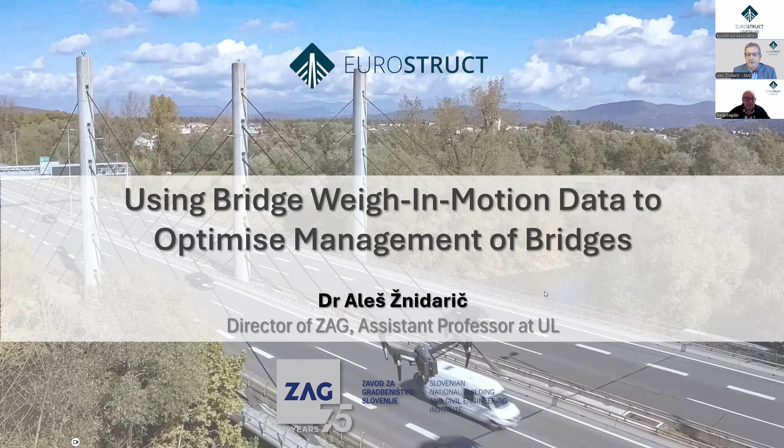So what I'm going to present today is roughly this: very briefly about bridge assessment and management, what is the motivation behind it, how do we measure heavy goods vehicle traffic, and then I will switch to structural analysis and bridge WIM. How can we couple those two methodologies and technologies, primarily by modeling traffic load effects on bridges? How do we measure some bridge KPIs with bridge WIM? I'll demonstrate how this works with some case studies, and I will conclude my presentation with work in progress and some ways forward.

If we start with motivation, a possible question of a bridge owner can be: how to sustain or improve the overall condition of the target percentage of the structures on my network, so that they are rated as such or higher, so that they don't fall below a certain level of damage intensity. So the questions are: what is rated as good and acceptable? How does condition affect capacity and later on safety? How do we assess or measure loads and performance of our bridges?

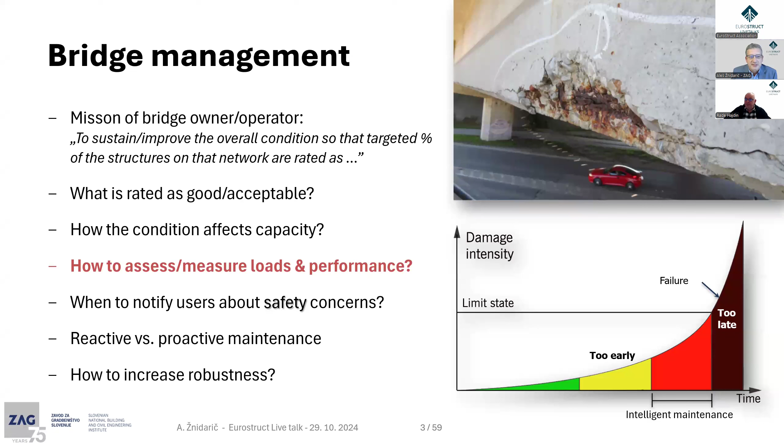I will focus today on this third question: how to assess and measure loads and performance in bridge management. First, a few words about bridge assessment — I will just repeat the well-known facts, if you wish. What is the difference between design and assessment?

I think we can agree the design of new bridges should be conservative, first of all because of uncertainties and changes of loads during the lifetime, because of decreasing capacity, and also all other unknowns during the lifetime. On the other hand, the assessment should be as optimal as possible, because it's expensive to post, strengthen, or replace a bridge. There is some estimate that adding 10% of capacity during construction increases costs by 10%, while if you do it afterwards, it goes into the hundreds of percent. So obviously, it should be optimal.

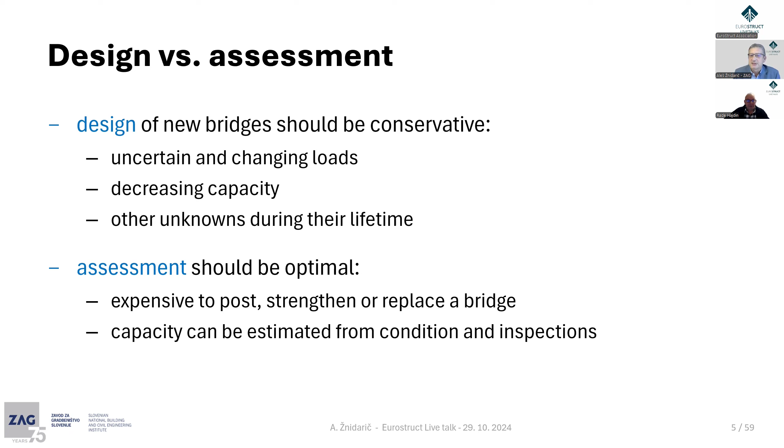Capacity can be estimated from conditions and inspections, and also loading can be measured and monitored. This is what we are going to talk about, and I will try to demonstrate how Weigh-In-Motion, particularly bridge Weigh-In-Motion, can help in optimal assessment.

Very briefly about structural safety of bridges. We want to ensure that capacity is higher than the loads. With bridge capacity, we have several challenges, especially with older bridges. We don't know exactly what materials were used, how much material was used, particularly reinforcement, what characteristics these materials have, and where they are in our structures.

The conditions change all the time, including climate. We try to get this kind of information from archives, from field testing, from non-destructive testing, which is not done all the time.

We name this procedure the bridge assessment trio. You start with inspection of condition and its assessment, then you move to some measurements and monitoring, and finally you do structural analysis and try to get out as much as possible, as much as needed.

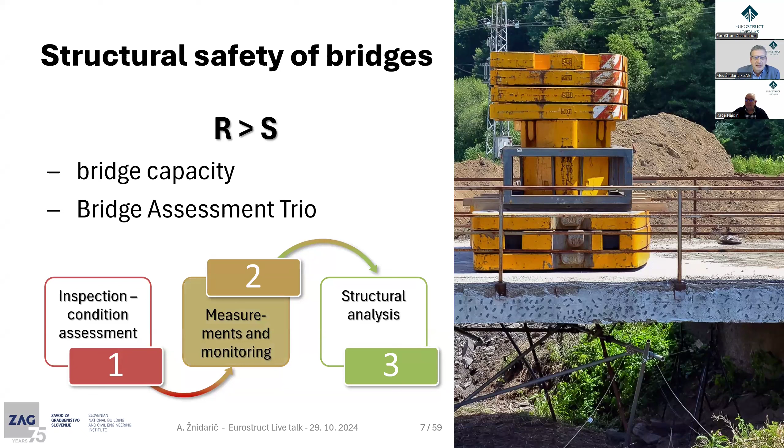Again, I will focus on the second item on this diagram. If I start with measurements and monitoring, what we typically do is material characteristics and damage extent monitoring and assessment, and we try to evaluate the actual loads.

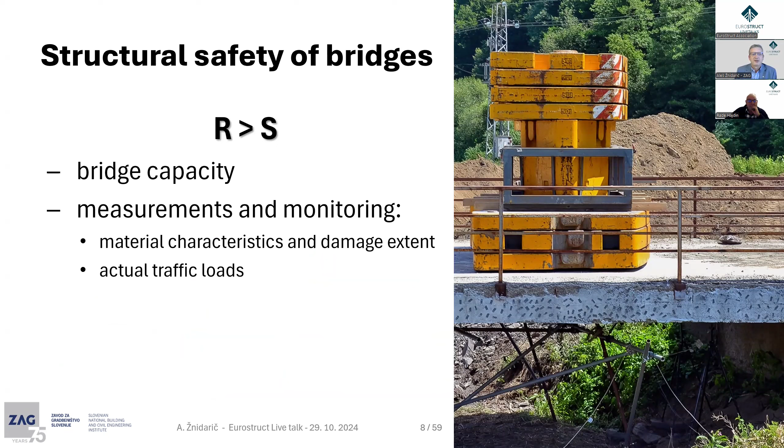Actual loads, of course, change a lot. This is a typical truck from 50, 60, 70 years ago, which is a typical age of a European bridge. Of course, this is far different from what we have today.

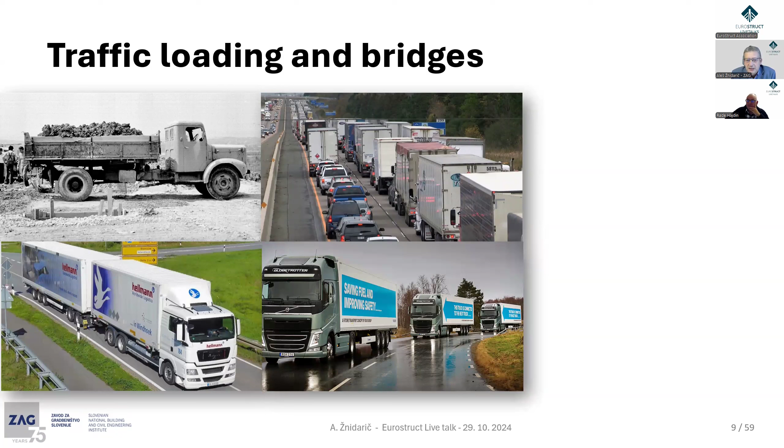Typical traffic jams on most European motorways. We know that heavier and longer trucks are coming, we know that truck platoons are coming, and they will both affect bridge loading. Not to mention today's already critical situations like traffic jams on the bridge, and these beasts, bottom right, the cranes, which are the most difficult vehicles that we face on our bridges.

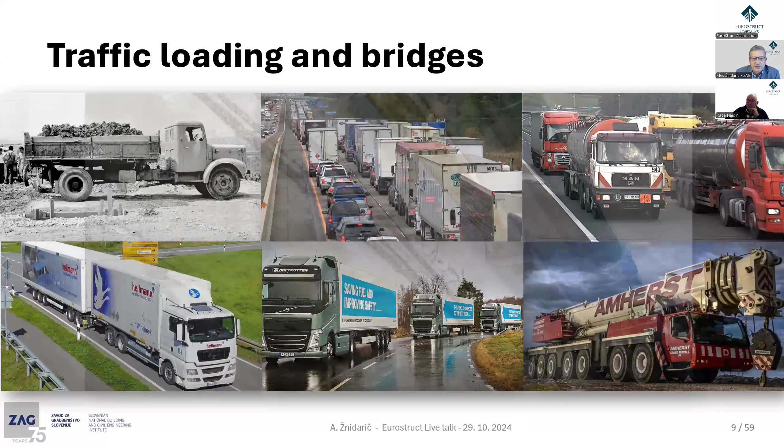And on top of that, we have bridges which are deteriorating, and we have to combine those things to get a realistic evaluation of their safety.

A further question is how the loads are transformed into load effects, stresses and strains, which we use in the analysis. It's not as straightforward as for pavements, where they actually take axle loads. We have to first do quite a lot of transformations. We have to know how the loads are distributed across the structure. One thing is theory, the other is how it is done in practice. Also, the dynamic amplification due to traffic loading is something that can be fairly optimized.

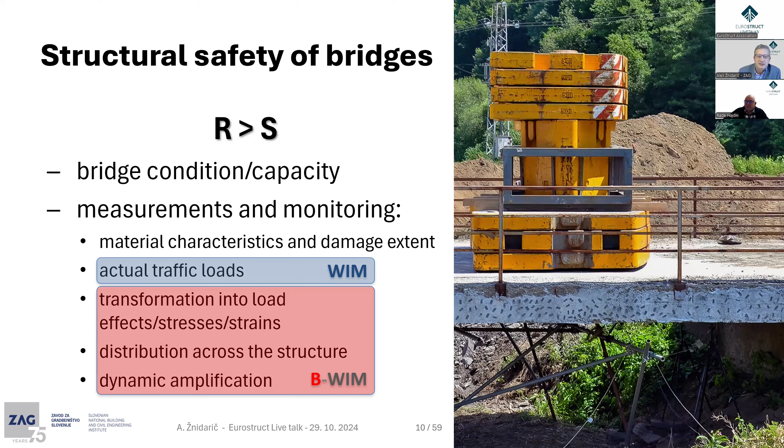Actual traffic loads can be obtained from any Weigh-In-Motion system, but there are some other things which can only be obtained from bridge WIM systems, unless you instrument the bridge with specific instrumentation. But bridge WIM can provide also some things which are essential, and I will explain that in a minute.

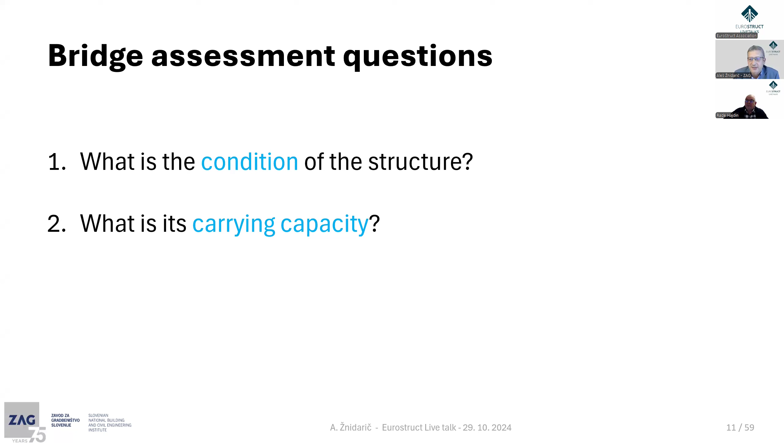Also, some important questions are addressed by bridge assessment. The first is, of course, what is the condition of the structure? Then, what is the carrying capacity? What are the real traffic loads, including dynamic? And what are the load effects? The first two are associated with condition assessment, and the last three with structural safety assessment.

So why do we want optimal assessment? The answer is pretty clear: we don't want to spend money on avoidable rehabilitations. If we do it in a conservative way, it's pretty obvious that we will do more than is needed.

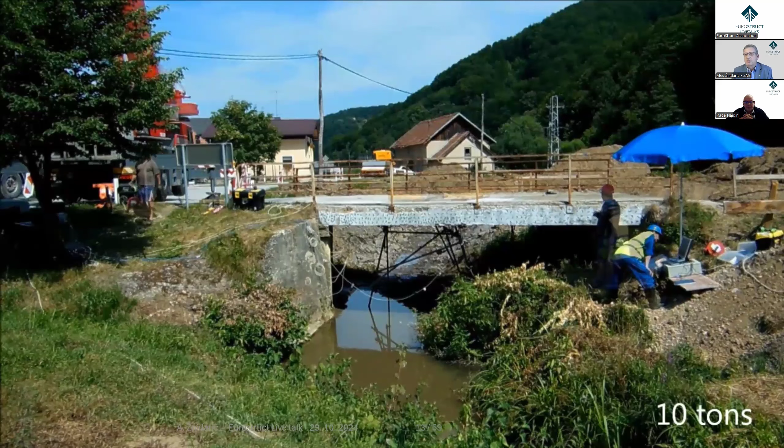Fortunately, bridges are stronger than we think, and I will give an example. This video was taken 12 years ago, when we did a load test, a proof load test, on a bridge which was replaced afterwards, because conventional analysis showed that the bridge was under-designed and had to be replaced. You will see that we put on it more than 70 tons in the Eurocode configuration, with two axles spaced 1.2 meters apart.

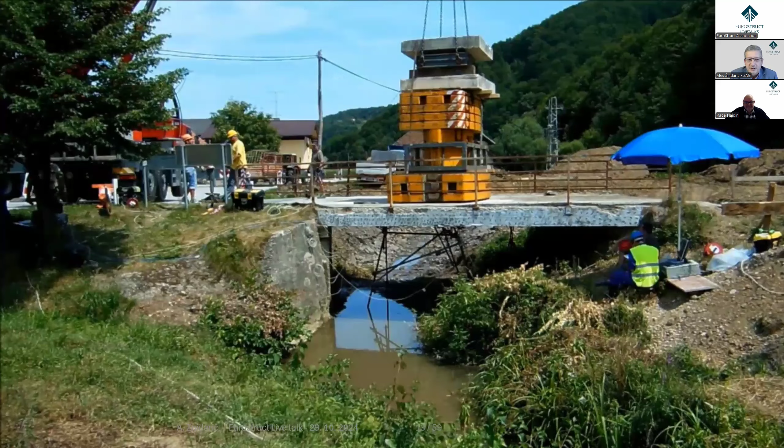The result was pretty clear: even with such high loading, there was a crack of 0.15 millimeter, but this crack closed after the bridge was unloaded. So clearly, the capacity of this bridge was much higher than calculated. That's very important, that we try to do as much as we can if we have to make a decision whether to close or even replace a bridge.

In addition to the capacity, load effects are less than in the codes. I will show in a minute how load effects that we calculate from the measured traffic are far lower than what we have in design codes. So our bridges are very likely safe, but the challenge is how to prove that they are safe. Another important thing is how to recognize critical details, and that's where engineering judgment and experience come into play.

If I focus on those old bridges, which are now the majority in our world, the first thing is that they were designed for lower traffic loads than we have today. I showed some photos before. Loads are quite different from country to country: 40, 44, 50 tons, even more in some countries.

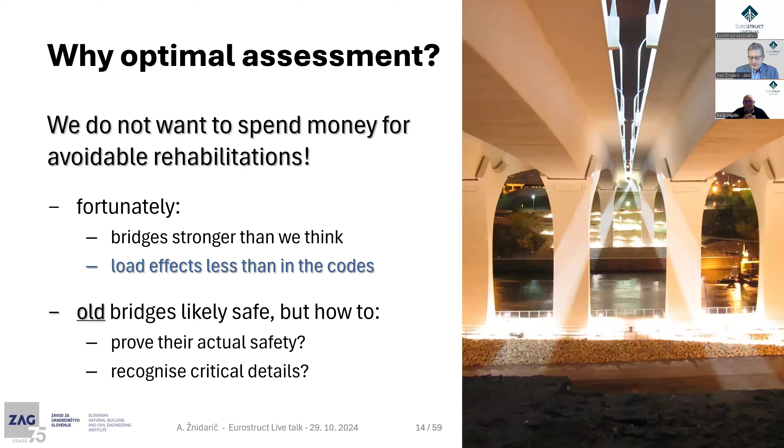What we know from the old bridges is that for today's loading conditions, they lack shear resistance, that sometimes they have low redundancy, in particular if they have Gerber joints, and we had some bad cases in not-that-far history when those bridges collapsed.

They have inefficient reinforcement layouts, especially with skewed bridges. Those who inspect bridges have probably noticed that in the corners of skewed bridges, there are more cracks than we would like to have.

Of course, there is low corrosion protection of post-tension tendons because of poor grouting and things like that. There are insufficient fatigue details for high loadings that we have today.

A critical thing is decay of stone masonry arch bridges. A bridge on the photo can be very strong - you can hardly destroy it - but if there are some details, some fallen out bricks or stones, this can be critical. So fortunately, these bridges, despite the age, are generally robust, but I focus on generally, so this is not for all of them.

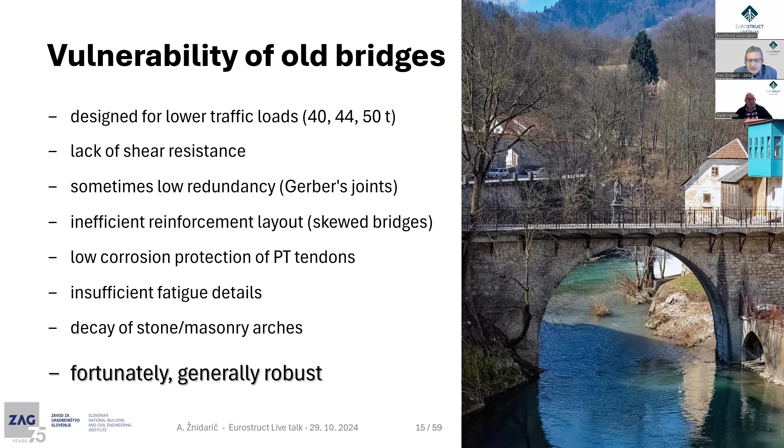Another problem we face with old bridges are the changing design rules. I have this example from Slovenia. We have 2,700 bridges on the state roads, of which 33% on the motorways and 56% on the state roads are older than 50 years.

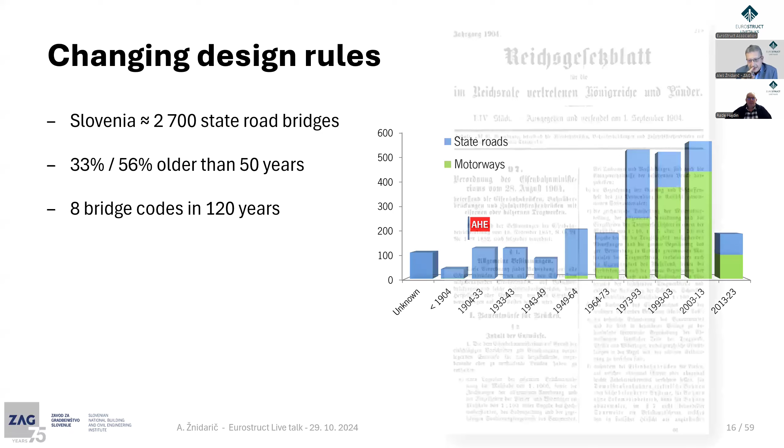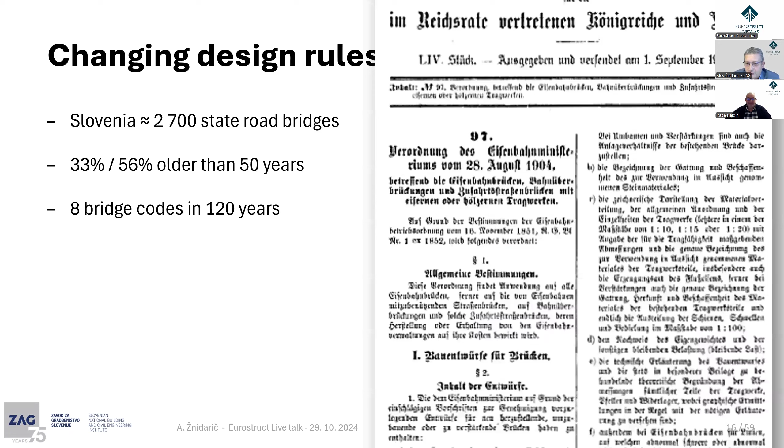The problem is that we have changed, in these 120 years, 8 bridge design codes, starting with the Austro-Hungarian code from 1904, and then many others from the Kingdom of Italy, Kingdom of Yugoslavia, Kingdom of Yugoslavia with dynamic amplification factor, 2 codes in the former Yugoslavia, then we used DIN, and then finally Eurocode.

So it's very important when you do the assessment to know when the bridge was built, and this information is quite often not available. So basically, for our case, we have 60% of bridges on the state roads and 1% of bridges on the motorways which are by definition under-designed.

And if we would perform the conventional assessment, we would have to spend an enormous amount of money to bring them to today's standard level. In addition to that, the capacity is reduced due to deterioration.

What is even more important - and this is information that I get also from other countries - is that information is very limited for municipal bridges. Very often, or at least if I speak for Europe, we have generally very good information about state roads and motorways, but if we move to the municipalities, it's a completely different story.

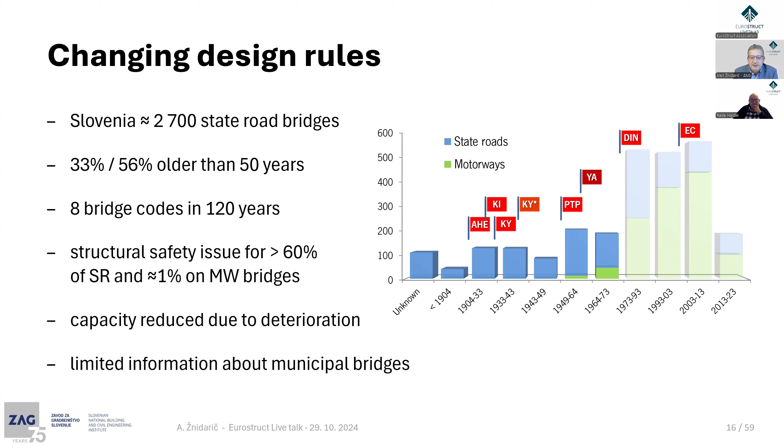So now I move to the other side of the safety equation, and this is loading, particularly heavy goods vehicle traffic and its effect on bridge assessment. So how do we measure heavy goods vehicle loads?

The most common technology still is traffic counters, which are everywhere - these are those inductive loops that you can see in the pavements. The problem there is that they provide absolutely no information about the axle loads, they just count the vehicles. This is something, but far from enough for what we need.

So we have several weighing systems. The most common, again, are the static weighing scales, which are also quite common. But they are completely useless for traffic load monitoring because they are limited to very specific vehicles, which don't provide comprehensive information about the traffic loading of our bridges.

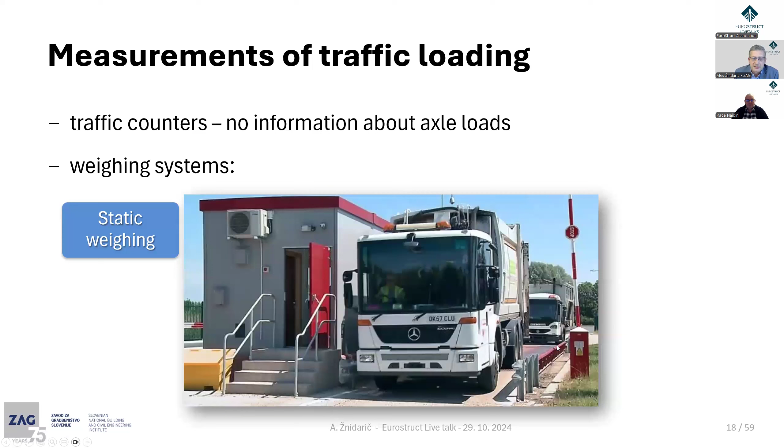So we basically have to do what is known as Weigh-In-Motion - this is the typical static scale. We have to do Weigh-In-Motion, which is again divided into low speed, which is on special lanes beside the main roads, done under controlled conditions. It is faster than static weighing, but still not fast enough to collect traffic information.

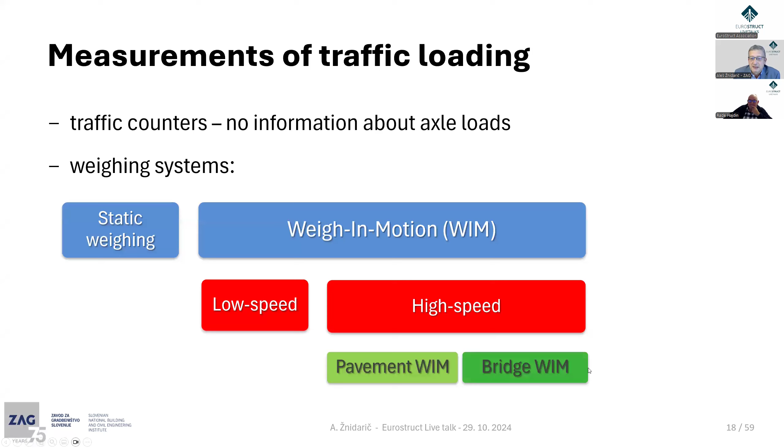So what are the high-speed Weigh-In-Motion systems? All Weigh-In-Motion systems measure dynamic heavy goods vehicle axle loads passing at highway speed and uncontrolled conditions. So two important things: highway speed, so no stopping, and uncontrolled conditions, meaning nobody is controlling how the measurement is performed. As a result, they do not weigh

vehicles, but they calculate the best static load approximation. That is important to know. All Weigh-In-Motion systems provide axle loads and gross vehicle weight, number of axles and axle configuration, vehicle length and axle distances, speed, vehicle class, and then based on the technology, many other parameters.

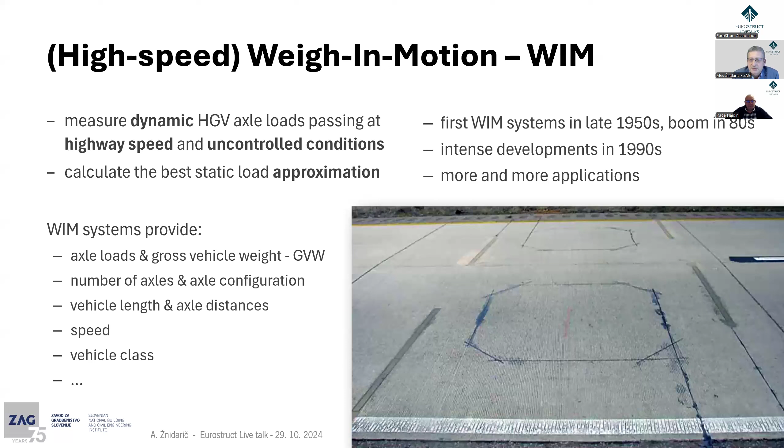First Weigh-In-Motion systems were developed in the late 1950s, and there was a boom of development in the 1980s. Today there are more and more applications, including, or should I say in particular, related to bridges. And there are lots of universities around the world studying new approaches and different applications.

This is the basic principle, generally quite simple. The bridge WIM is a measuring device that uses an existing instrumented structure, which can be a bridge or a culvert, to weigh road vehicles or trains in motion at normal operating speed. So basically we instrument existing structures.

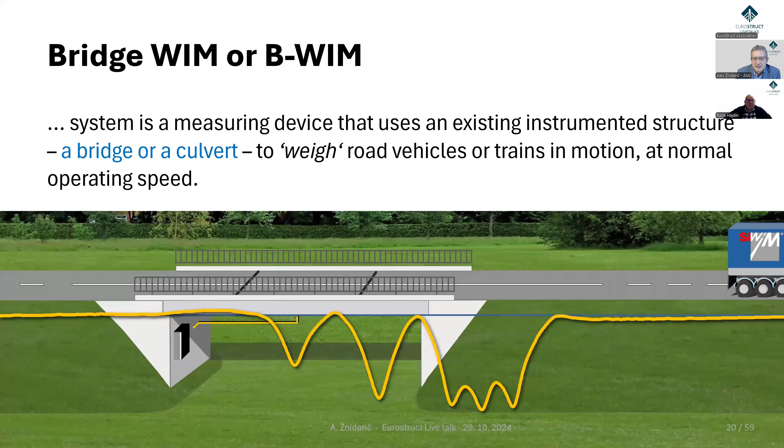In the past, there were lots of questions, whether do we have to build a bridge? Of course, we do not have to build a bridge. We use existing bridges, existing structures, we instrument them and use the algorithm that inversely calculates the axle loads that caused the bridge response that we measured.

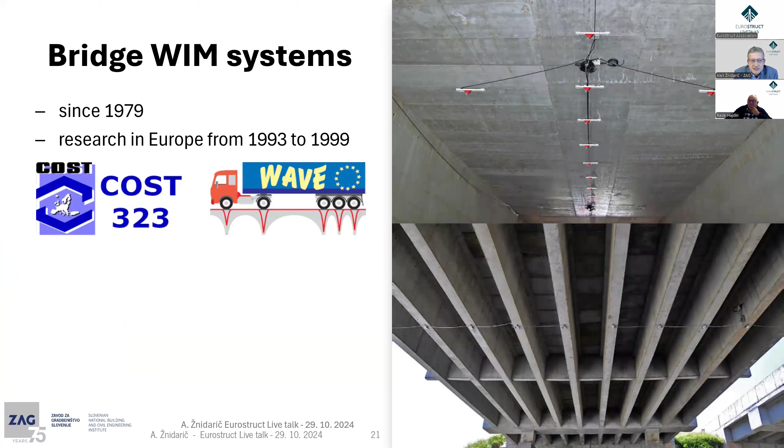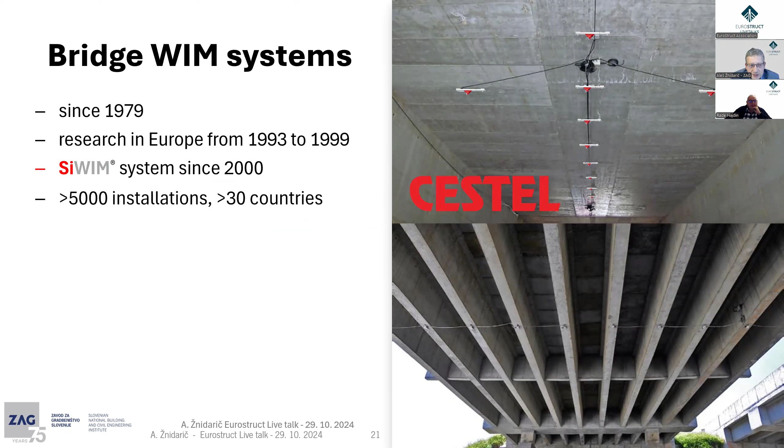Bridge weigh-in-motion systems are over half a century old, or almost half a century old, the basic principle. But the main research was done in the 90s within two European projects: the first one was COST 323 and the WAVE. Those two projects resulted in the SiWIM bridge weigh-in-motion system that is today marketed around the world by the Slovenian company Cestel, which had more than 5,000 installations in more than 30 countries until now.

It's based on strain measurements. This is a typical strain transducer. Transducers are placed either on the individual beams, as you can see on the photo below, or equidistantly over the width of the slab, and the direction of traffic is from the left to the right.

Today, they are used and also developed in Europe, both Americas, and in Asia. The main benefits compared to the traditional pavement weigh-in-motion systems are that they are portable, which means that you don't disturb the traffic, which is a very big issue with today's traffic, especially on motorways which have really dense traffic, where you can wait for months to get a roadblock to install or repair the system.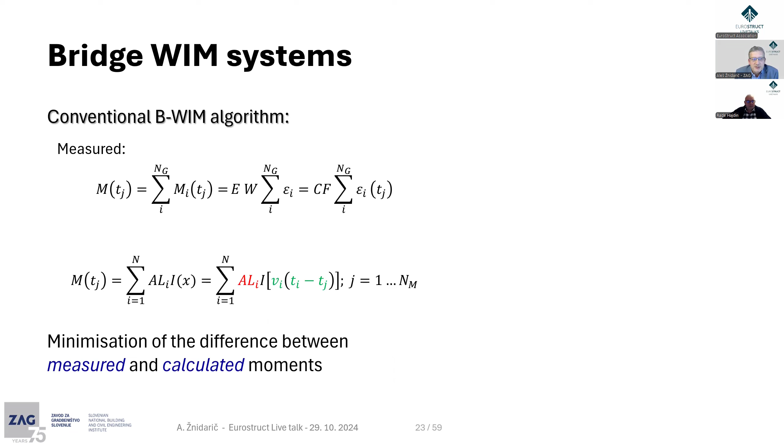But the principle in general is rather straightforward. We measure strains which are proportional to the moments, and we also can calculate the same bending moments by multiplying the unknown axle loads with the known position of the vehicle, known speed of the vehicle, and known influence line. Remember the influence line, because this is one of those parameters which is also important for bridge assessment.

And what we basically do, we minimize the difference between the measured and calculated moments, which you can see on the figure below. If you have a match like this one, where the red is measured and the blue is calculated from those influence lines multiplied by the axle loads, you know that your influence line is a good one, or as good as it can get.

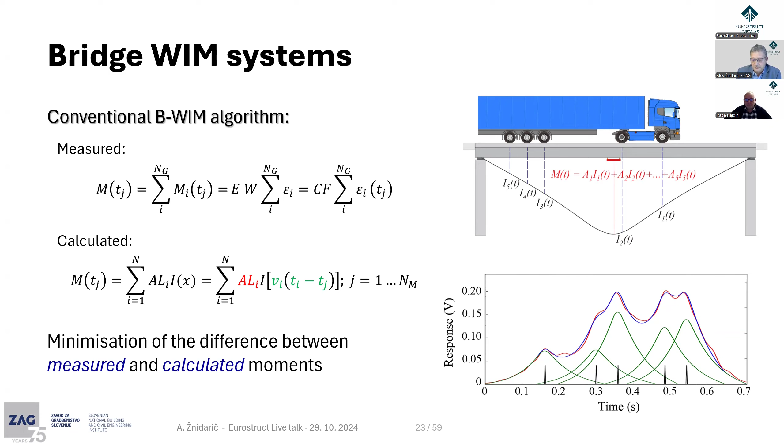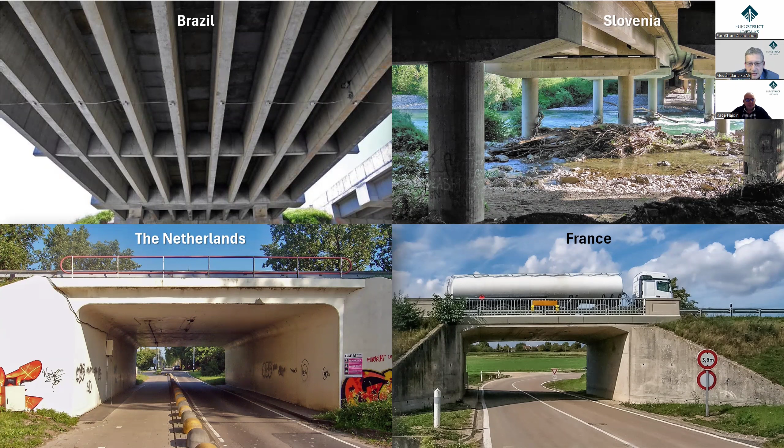These are some typical installations. Okay, I don't know what happened, I apologize for that. Typically, bridge weigh-in-motion systems are installed on short to medium span bridges up to 30-35 meters. So beam bridges like the two on the top, or slab bridges like the two on the bottom. But you can also do it on some other bridges.

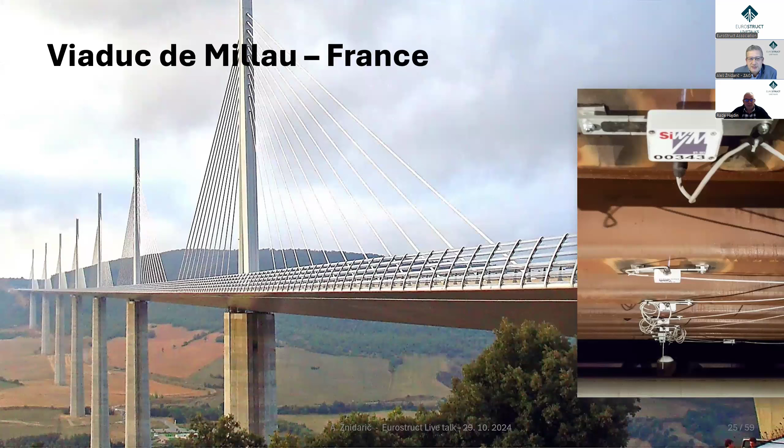This was done on the Viaduc de Millau in France. I'm sure you know this bridge. This was done on the orthotropic deck bridge. This was actually the first installation on such a bridge.

In another project, we did the first railway bridge WIM application, and also on the first truss bridge. This was an interesting endeavor, because it was the first time that we weighed trains.

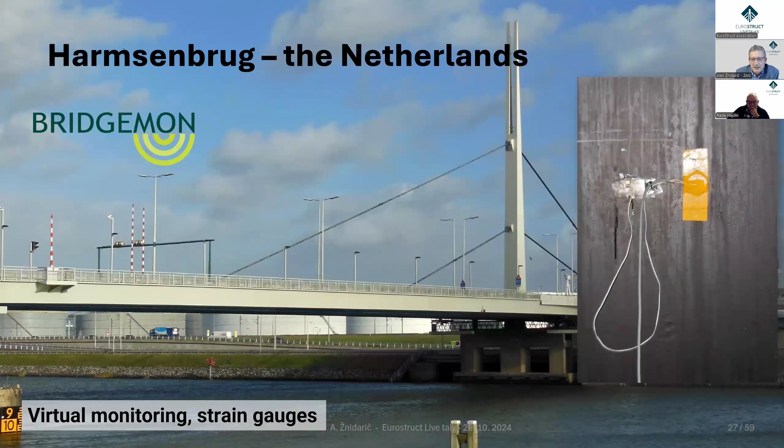In another project, we instrumented another orthotropic deck bridge, which was used for what we call virtual monitoring, which means that the numerical model of the bridge is so well optimized that you can perform measurements also in places where there are no sensors. This is a very promising technology, which can improve the assessment.

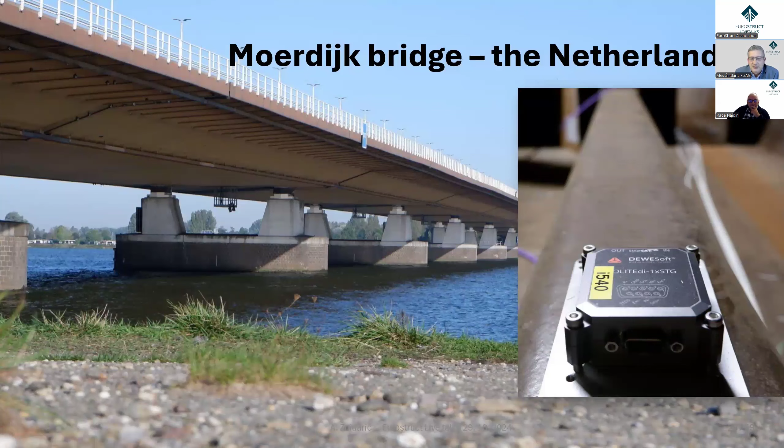Just recently, we performed measurements on the Moerdijk Bridge in the Netherlands as well, which we know for years has issues with the insufficient capacity of the orthotropic deck bridge. This was associated with bridge monitoring.

Then in the last few years, we also did more measurements on railway bridges. So these are two examples from Austria and Italy that were performed in the Assets4Rail project.

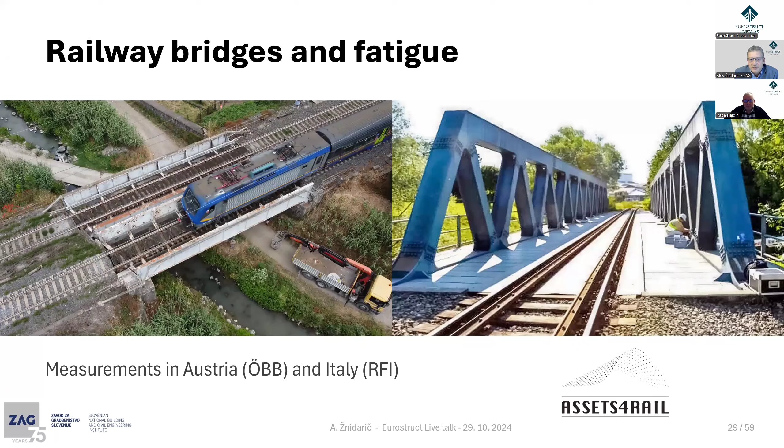So now, how do we couple structural analysis and bridge weigh-in-motion measurements? The important thing is what's the actual traffic loading, and this can be obtained by all weigh-in-motion systems, pavement and bridge weigh-in-motion systems.

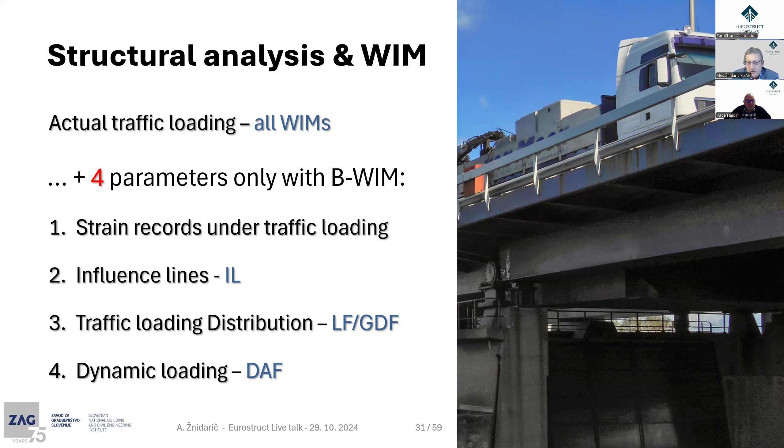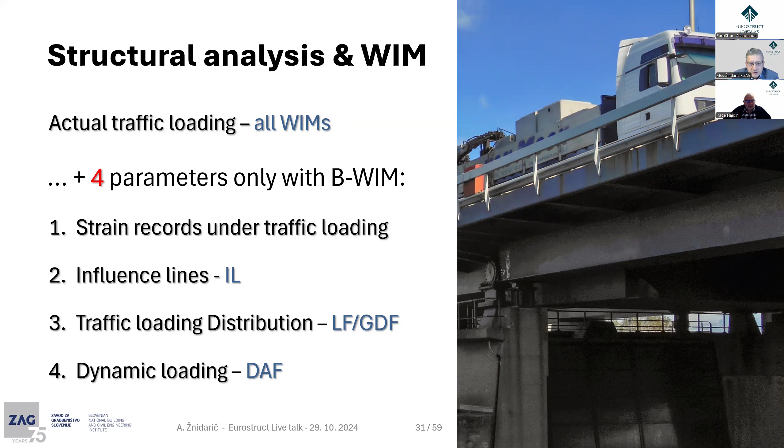But bridge weigh-in-motion systems can measure 4 additional parameters. First of all, strain records under the traffic loading, so you can directly couple the response of the bridge under the traffic loading, because we use the same strains for bridge WIM as well. From these records, we evaluate influence lines, traffic load distribution, and dynamic loading. I will show now how these things can help.

Important thing as well is that traffic loading changes with time, so we have to consider that.

Modeling traffic load effects on bridges, there are many methods available. What we need are traffic loads converted in load effects. In this case, you have bending moments which were converted from axle loads using the influence lines. And what we are interested in are the extreme loads. We don't care much about those regular loads. We need very good data about the extreme loads.

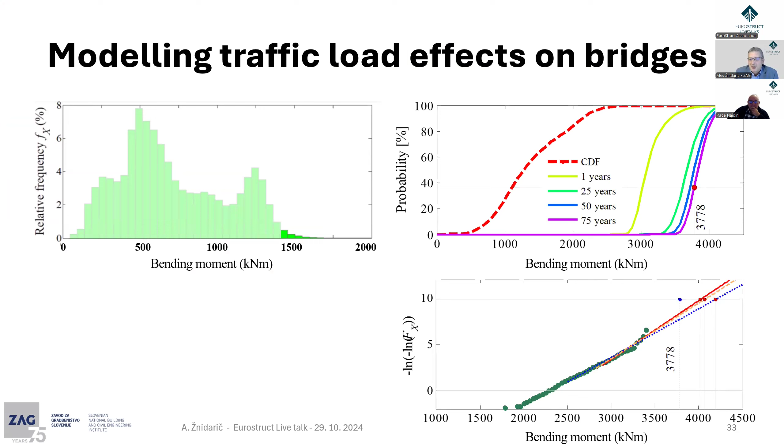Then there are different methods, from the extreme value distributions on the bottom, convolution method on the top, which should give similar results. Some authors are using long-term simulations instead of that.

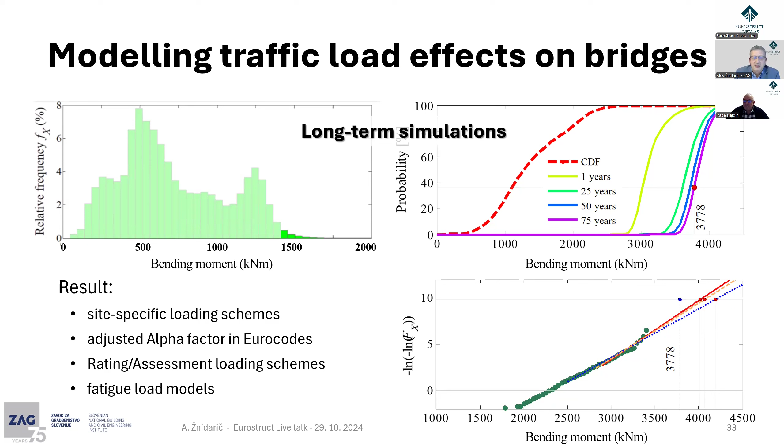The main objective of this exercise is either to develop the site-specific loading schemes, meaning we have data measured on a specific bridge that we would like to optimize. We can adjust the alpha factors from the Eurocodes, or develop the rating, sometimes called assessment loading schemes, which are more appropriate for assessment. We can also use this data for fatigue load assessment, using other methods that are available.

One important question is how much WIM data do we need for bridge load modeling? We did that some years ago with a lot of available Weigh-In-Motion data. It turned out that a safe amount of WIM data is 100,000 heavy load vehicles. If you go below 50,000, you will severely underestimate the loading. It's conditionally acceptable between 50,000 and 100,000, but you have to be aware that you will still be underestimating.

This is for the bending moments, and a very similar situation we got for shear forces. So a very straightforward advice is, if you do this kind of assessment, collect at least 100,000 heavy gross vehicle loads, axle loads and gross weights, and axle spacings, because this also influences load modeling.

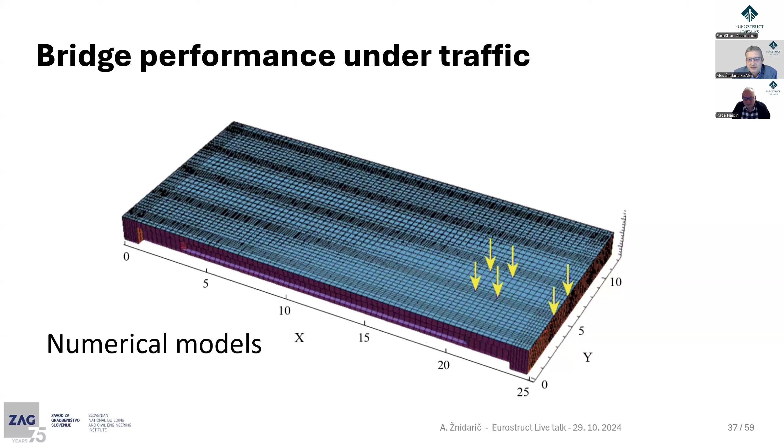So how do we now measure bridge performance under traffic? Typically, what is done is some numerical models that we try to optimize as much as we can, but also a very common procedure is to do load test verifications. In particular, diagnostic load tests, which means that we load bridges to 60, 70, 75% of the design load, as much as is achievable.

On this bridge, we used 48 trucks. Fully loaded, actually even overloaded trucks, and if I remember correctly, we only achieved 65% of the design load. This is the purpose of the diagnostic load test, to verify how your model, how your design was correctly done.

What we did in many European projects, starting in Samaris, which started in the late 1990s, until Bridgemon, which finished some 10 years ago, is that we tested how we could use bridge Weigh-In-Motion systems to obtain similar information than with traditional diagnostic load tests.

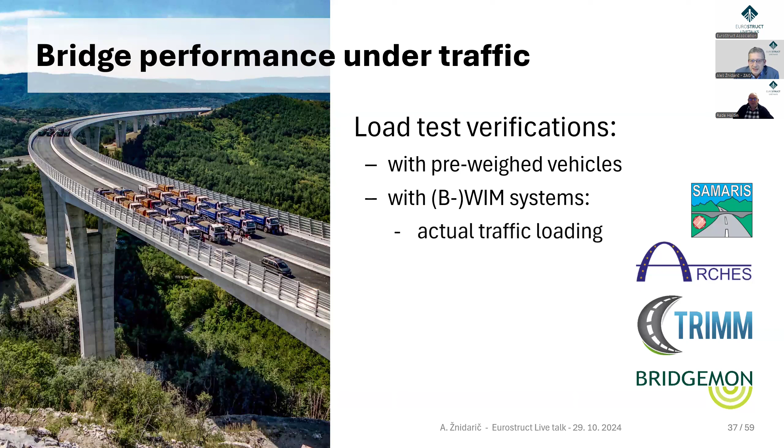So apart from the actual load testing, we measure influence lines, lane factors or girder distribution factors, and dynamic amplification, and we named that soft load testing. This is basically a lower level diagnostic load test, lower because the load levels are much lower than with the traditional diagnostic load test. For that reason, it's only appropriate for checking of the serviceability limit states.

The typical example we face very often, I must say, is that the bridge owner asks, I have this and this traffic on my bridge, is the bridge still safe? In such cases, we can, in a very elegant way, demonstrate whether the bridge is safe or not.

I mentioned the influence line. This is, in this case, used as a key performance indicator, but the influence line itself is a key parameter also for bridge Weigh-In-Motion. Basically, it uses the same approach as for calculation of loads after you already have the influence line, but in this case, the influence line is also an unknown, which is calculated.

The approach we developed is with cubic splines that describe the influence line, and this is again minimized to get the best possible match. This is done for hundreds and hundreds of different vehicles that cross the bridge, and this influence line is calculated for each of these events. On this figure, you see an example of 528 different crossings. In blue, you have the mean influence line in this case.

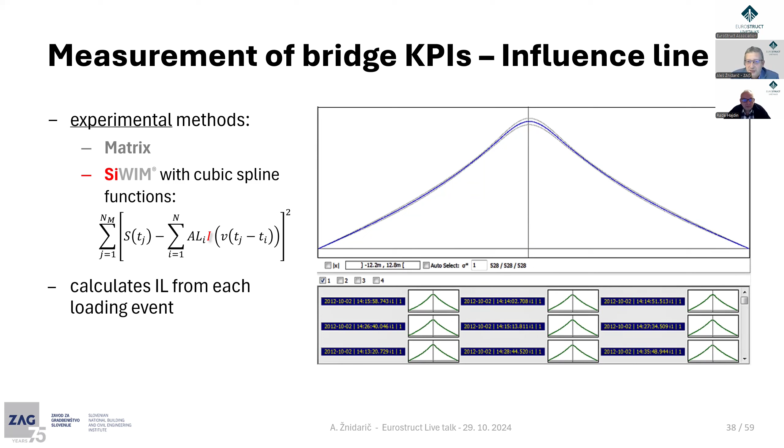And the gray lines are standard deviation of this influence line. In this case, I must admit this is a very good case. You can see that this distribution is very low, and I must also say that this is converging very rapidly.

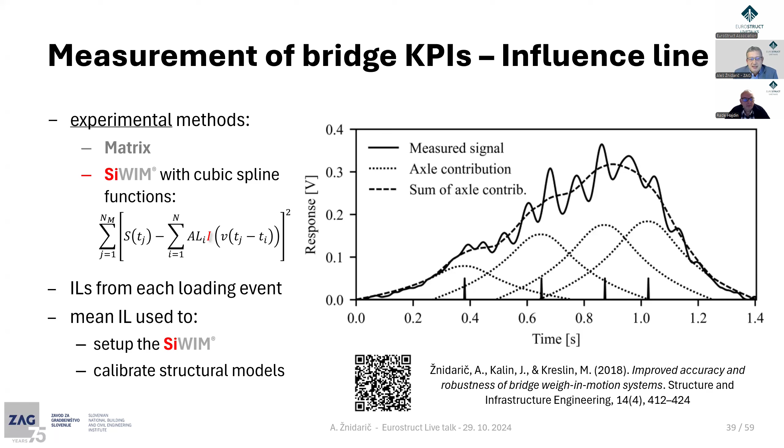So this influence line is then used to set up the SiWIM system and also to calibrate the structural models. This is an example of how this is done. This was done in the US on a typical highway underpass. It's interesting because this underpass had a steel hinge here, so you would expect it to behave like a theoretical simply supported structure.

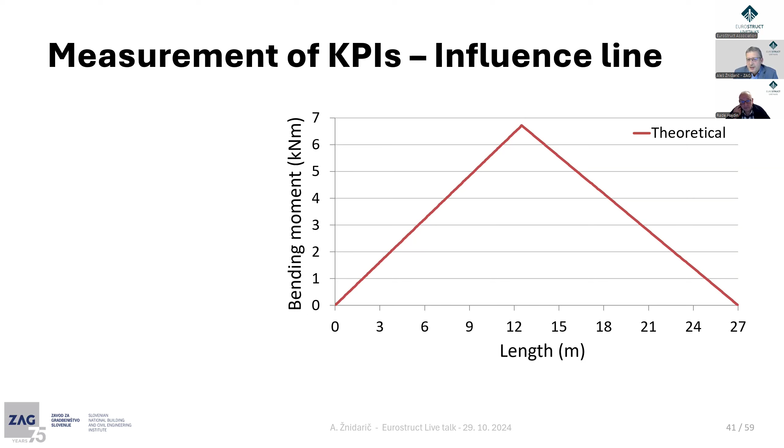In addition, this bridge had very poor access, so we expected very high dynamic amplification because of that. So the theoretical influence line for this 27-meter long bridge should look like this, but based on the measurements we got a slightly different situation. This was again calculated from hundreds of loading events.

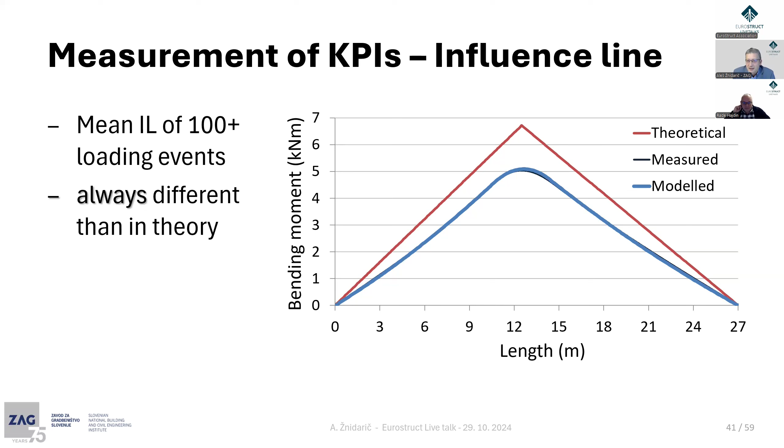Then it's very easy to update your structural model so that it corresponds to the measurement. What I'm showing here is a very simple 2D model, but you can do the same thing on a model of any complexity - there is no limitation about that. According to my experience, it is always different than in theory, because if it's not like in theory on this case - which is really simply supported with a steel hinge - then on some other bridges with more issues around the supports, the differences are even bigger.

Again, you have a reference down there, but the result of this was that on this particular bridge, the actual bending moments are only 70%, 77% of the theoretical ones if we use the theoretical influence line. In extreme cases over the last 20 years, we got several cases below 50%, in the worst case even 45% of the theoretical influence line. So that is substantial, and if you use this in your bridge assessment instead of theoretical values, the savings are substantial.

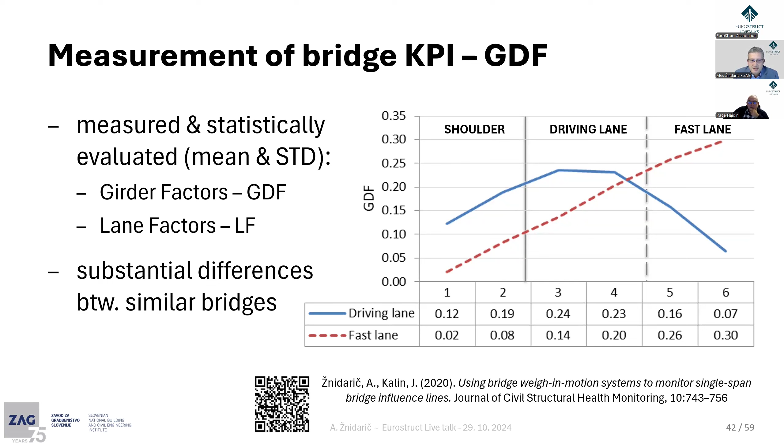Similar thing is with the load distribution. There are typically two approaches: one is girder factors, so you go girder by girder, like in this case - 6 girders, you can see the measured distribution. Some people use lane factors. The important thing is that there are substantial differences between similar bridges. You can have a slab bridge and another slab bridge which is very similar, but the measured load distribution can be different. So again, savings because of the actual values and because of the higher reliability of the data you are using.

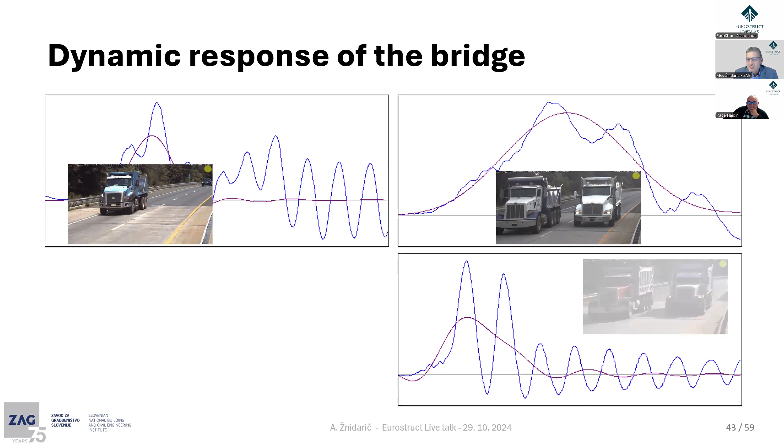Dynamic response of the bridge is also something we are all aware of. Again, the same bridge from the US: with one truck, very high dynamic amplification. Another case with 2 different trucks, again high but lower; with 2 similar trucks, extremely high. But if you have the extreme loading with a load crane, then the dynamic amplification is practically zero.

This is how we calculate dynamic amplification. Basically we use the most traditional approach: total load effect versus static load effect. Static load effect we approximate by filtering - again this is explained in some papers. But the important thing is that for practically every vehicle crossing, we get the dynamic amplification value.

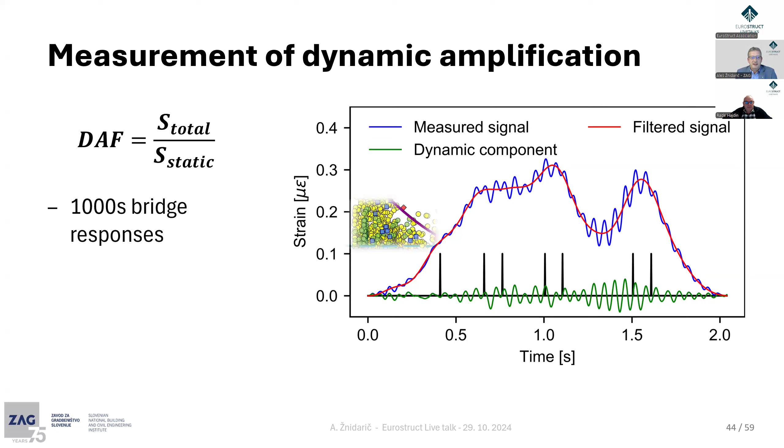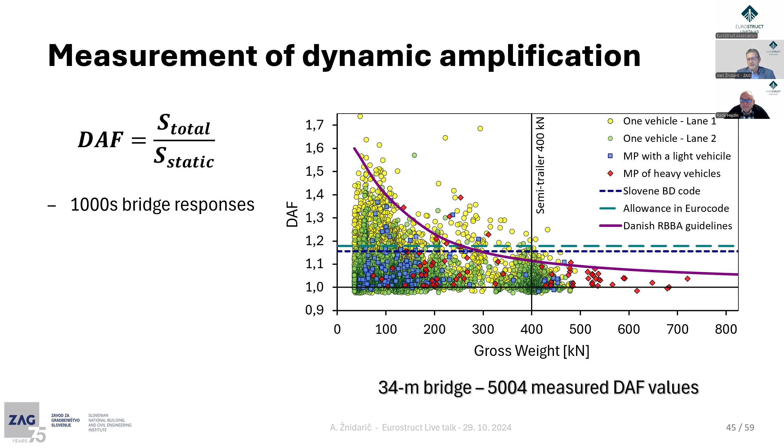This looks like this - an example from the same bridge, 5,000 DAF values. You can see when you compare to different design methods that when you go to the extreme loads on the right side of the diagram, these DAF values go down to 1, which highly corresponds to theoretical calculations like the Danish reliability-based bridge assessment guideline, published many years ago. They calculated similar curves. With measurements, we can measure that.

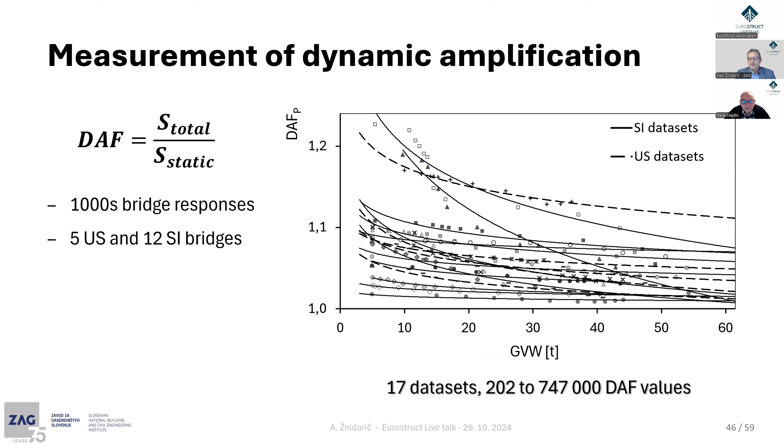What we did was evaluate 17 data sets from 17 bridges in the US and Slovenia. They were differently populated, from a couple hundred values to almost 750,000 DAF values. If we plot that on the same diagram, we had to convert gross weights to percentiles so we can compare values. We get a very nice linear relationship with weight, and what's important is that even at the worst bridges, those values went down below 1.1. Again, if you can measure that, there is another saving in your bridge assessment.

So this is, we can conclude in line with theory. The issue is how to implement this in codes, because I'm not aware that anyone would be implementing that to be available for general use. Again, the paper below gives more details about how we came to these results.

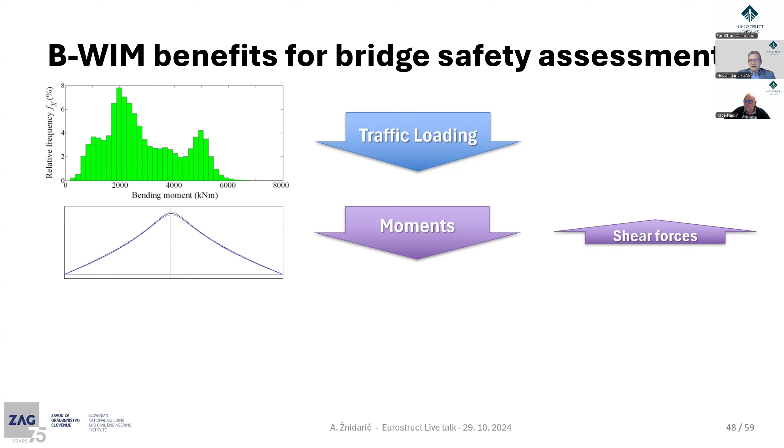To summarize, if we have the true traffic loading, this will have a positive effect on bridge safety because it will decrease the loading. Because we have the actual influence line instead of theoretical ones, it will again decrease the moments. Of course, it will slightly increase the shear forces in short span bridges, but that's far less evident than the moments. And dynamic amplification loading will go down, which means bridge safety will increase. This is basically how we can show that some, particularly old bridges, are still safe for modern traffic.

Basically, more reliable information means lower uncertainty of results, which also influences the safety factors that we use. But we also have to point out that all these measurements are site-specific and also time-dependent, so this has to be taken into account, but I didn't have time to talk about that today.

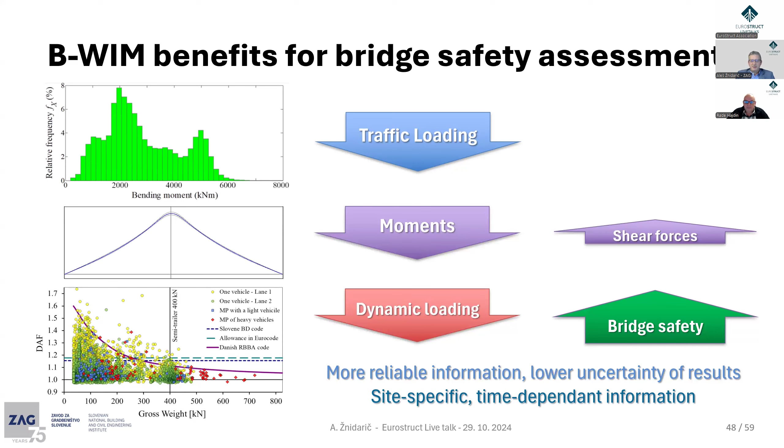How we implemented that, this is the case study from Slovenia. In Slovenia, we don't have any assessment code. We just prepared recommendations some 25 years ago, the first edition. We updated that some 15 years ago, particularly because the level of loading increased tremendously after we joined the European Union in 2004. The approach we used is the rating factor, which originates from the United States and is used also in many other countries.

So basically from the resistance, we deduct the dead load effects and divide that by the live load effect, and what we get should be greater than 1.

As I said, we developed the loading schemes, which we updated after the heavy increase of traffic some 15 years ago. We also developed procedures to select safety factors for the dead load and live load. The dead load one is affected by the source of data, basically whether we have the data, if we have just the design, or if we go to the bridge and measure everything. The live load effect safety factor depends on whether we measure load effects, and the factor for capacity reduction depends on the condition of the structure.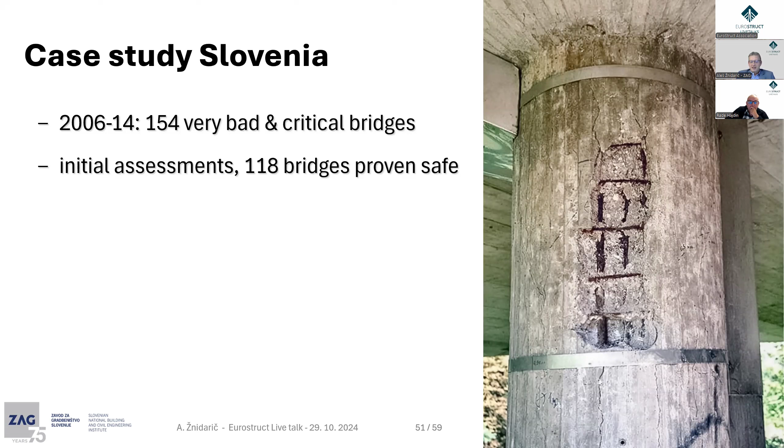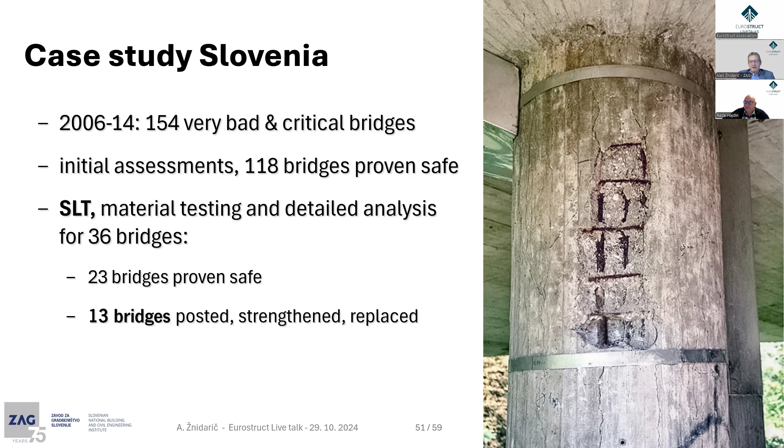So in years 2006 and 14, we did 154 assessments of bridges that during inspection proved as very bad or critical. When we performed the assessments, just using the approach I described without any measurements, we showed that 118 of those bridges were safe. We performed in-depth analysis, including soft load testing and detailed analysis, on 36 bridges, of which 23 additional bridges were proven safe, and only 13 bridges were later posted, strengthened, and finally replaced.

If we talk about costs, the replacement value of all 154 bridges was estimated at more than 100 million euros. After initial safety assessment, this cost was reduced to 26 million. And finally, after all those procedures were performed, the cost for the 13 bridges was roughly 9 million euros. Of course, the value of the analysis performed was way lower than the cost savings, because we did this kind of analysis. And not to mention that indirect costs are at least twice those of the direct costs if you have to close the bridge or replace it.

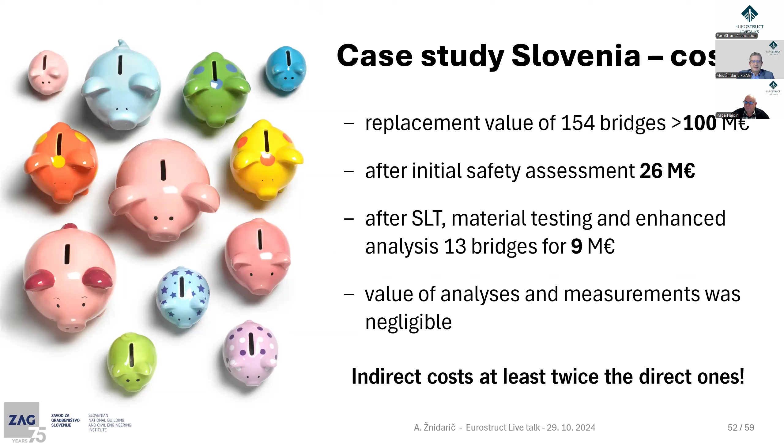So, work in progress, ways forward. This is very brief information. What we do at the moment, especially the PhD student Doron, is working on improving the finite element model updating.

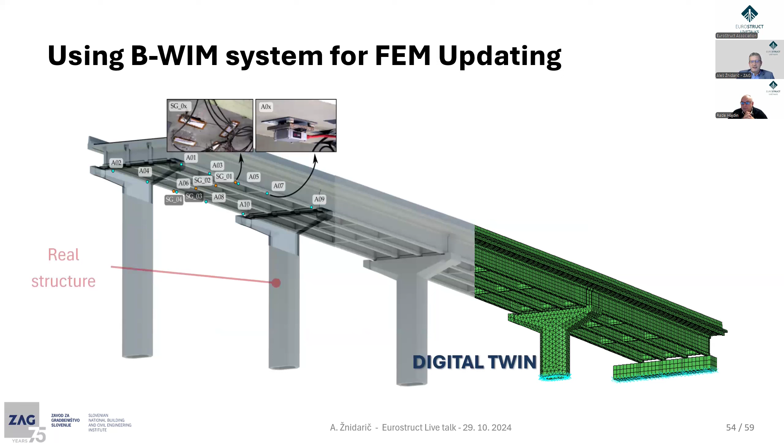So we have a heavily instrumented bridge with more than 200 sensors, in particular strains and accelerations. He did a very detailed structural model, so we have a digital twin, which can be used also for this virtual monitoring that I mentioned before. The bridge model is now so well developed that it can be used also for other conclusions that we can get from the assessment.

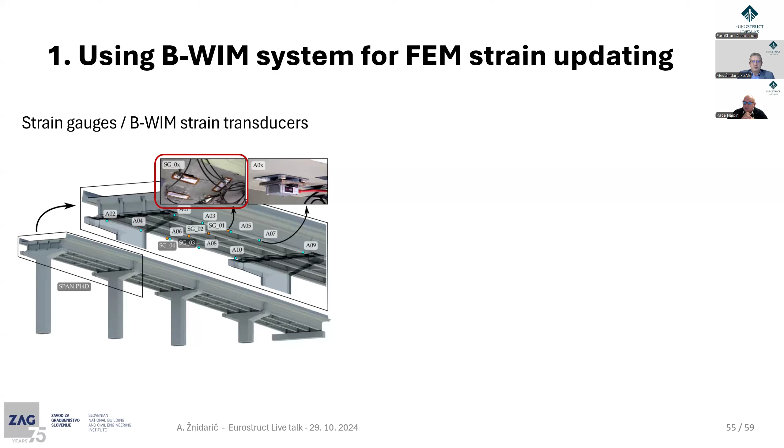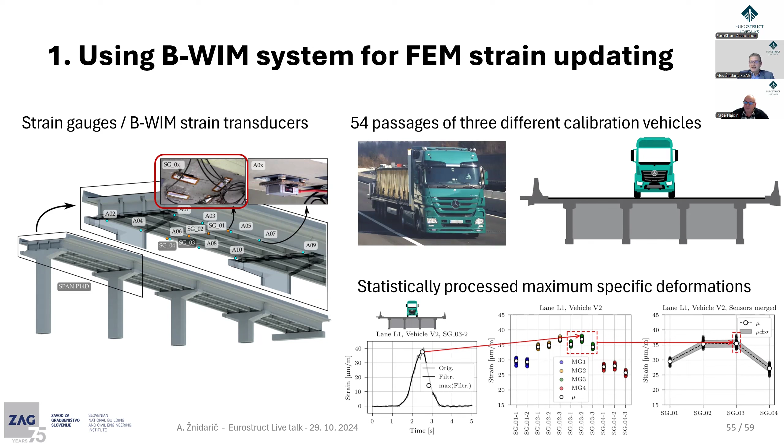He divided his work into 3 stages. The first is just using bridge weigh-in-motion system strain measurements for finite element model updating. Based on that, he used 54 different calibration vehicle crossings, and he calibrated his model, where he showed that, as expected, the stiffness of the bridge was underestimated, and there are roughly 20% savings just in the stiffness of the bridge.

In his second stage, he included more traditional measurement of acceleration. So he defined 3 variables that he wanted to calibrate: the main girders, the inner girders, the outer girders, and all the rest.

So the deck and the safety barriers. These were the 3 variables. Then he calculated modal parameters from the measurement, acceleration measurements, and all the strains under the trucks, which are measured as permanent monitoring of the viaduct. And what he performed was

an error domain model falsification approach. This is methodology which is relatively new for bridges. Basically, the point is that you assume that the models cannot be fully validated by the data, but instead they can only be falsified by defining the range between the measurement values, and then you perform a number of different combinations of all your variables.

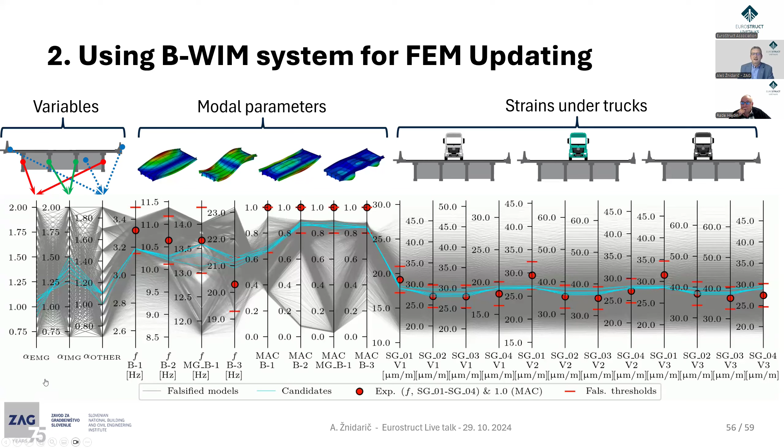He did about 2,000 different cases, and what you see in blue in the middle are those 7 out of 2,000 who fit all the thresholds of all measured parameters. This is very much in line with what he also obtained from the first stage, the strain calibration, which means that basically some parameters are generally 20% underestimated, but here you can clearly see how those parameters affect modal parameters and also strains.

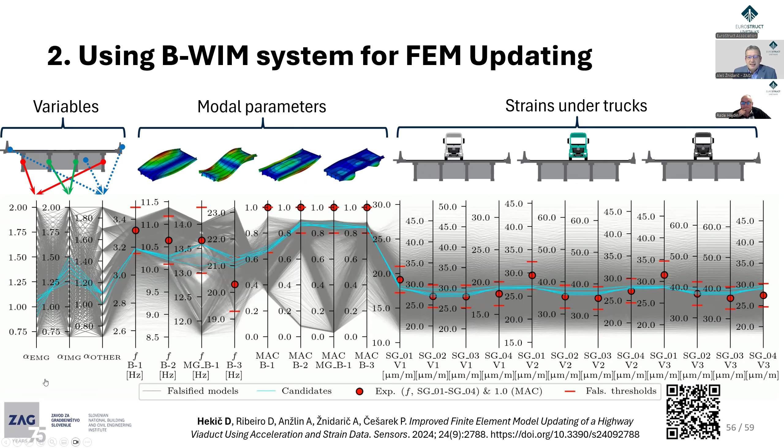In the next stage, he will continue with basically a step backwards - how to use the bridge-WIM influence line to update the finite element model using all the knowledge from stages 1 and 2.

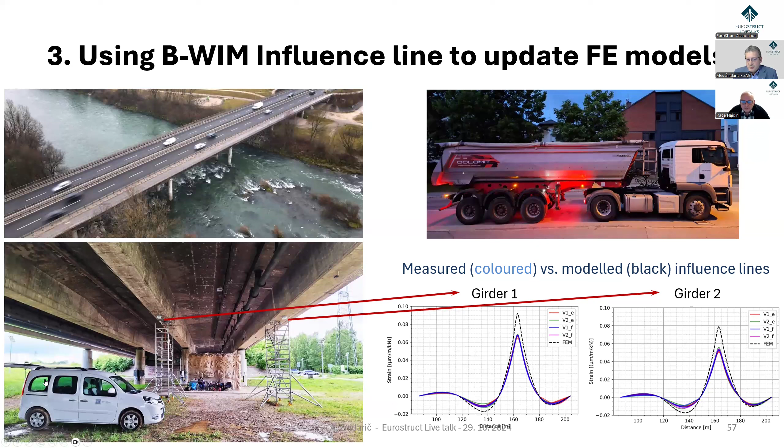Measurements were done. So again, this was on another bridge. Influence lines again show that the bridge is stiffer than the theory. And now we will see how this will be implemented in further analysis.

Another project that we are working on is using artificial intelligence in improving, in particular, detection of vehicles, because those measures are unattended, so you can measure all kinds of different things. We also know that identifying incorrect axle configurations can lead to wrong bridge weigh-in-motion results, and as a consequence to errors in bridge load modeling.

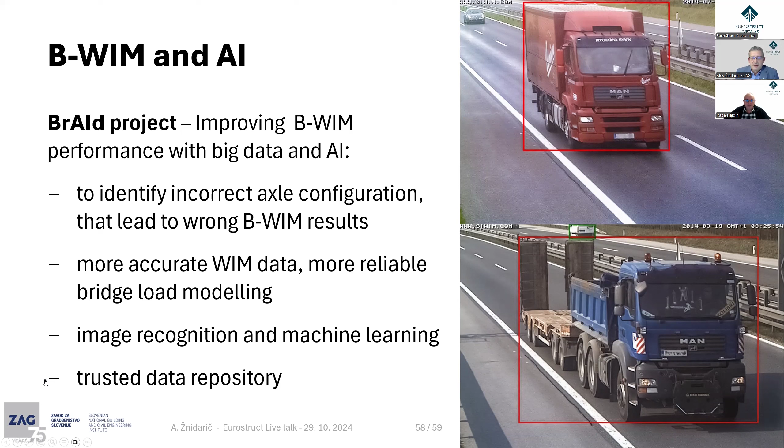So we are performing in particular image recognition and machine learning procedures, and I must say that the first results are really promising. The vehicle classification has improved quite considerably, so we are looking forward to the results of that. What we will also do is have a trusted data repository published somewhere so that other researchers will be able to further improve the vehicle recognition algorithms.

So if I summarize my presentation, I think we agree that if we perform bridge management, it's too costly to replace all problematic bridges, so we have to do what we can to optimize the assessment. It's also clear that we have some challenges of collecting quality data, but I dare to say that almost any measured data is better than no data.

It's also well known that a lot of data is already available. Probably too much data is available, but we don't do enough with it. And I hope that I have shown that bridge-WIM data is useful in this process as it reduces uncertainties, and of course, as a consequence, it saves with measures that we perform in bridge management.

I cannot stress enough that engineering knowledge, judgment, and experience is important, because if you just do measurements and structural modeling, all kinds of questionable things can arise. So you must be able to perform a proper judgment of your results.

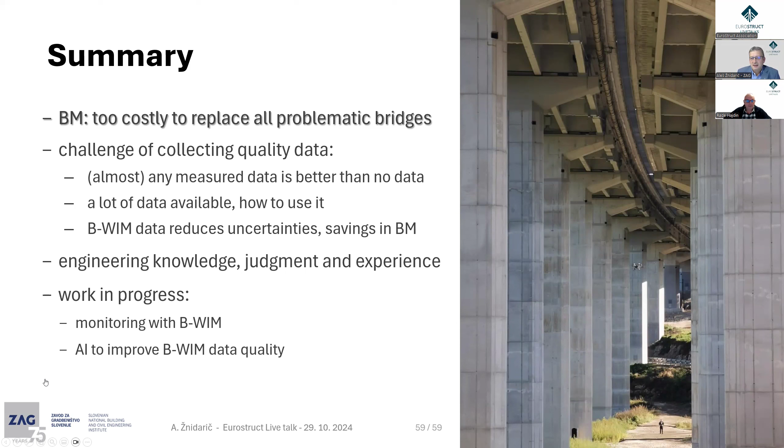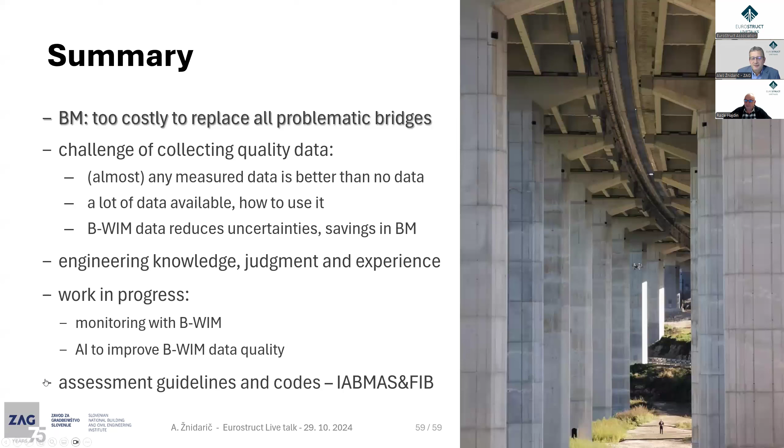And I mentioned 2 very promising techniques that are being developed, which we hope will further contribute to the knowledge in this area. I can also point out that this is slowly becoming part of assessment guidelines and codes, and the new FIB recommendations guides that are under development will also include a great part of the topic that I have explained today.

With this, I thank you for listening. I was only 5 minutes too long, so I hope that you will still have time for some questions.

Of course we do, Aleš. Thank you very much for this excellent and invigorating talk. And I guess a lot of people are really eager also to pose questions. We have already some questions here in the chat, and I would like to encourage everybody to pose questions in the chat in the available time that we have.

And I will start with a question which came from Goran Milutinovic. He says, does WIM systems, generally speaking, pavement and bridge WIM, have problems with capturing correctly the traffic jam loading scenarios?

Very good point. Weigh-in-motion systems in general do not work in jam scenarios because practically all systems, pavement and bridge WIM in particular, need a certain constant velocity over the sensors, whether those sensors are built into the pavement or, in our case, the bridge. So if you don't have a more or less stable or constant velocity, the readings or the results will be more or less